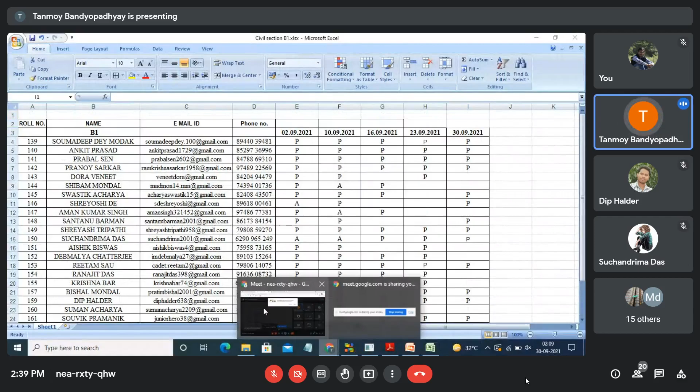So today we'll be starting the fifth experiment, which is the torsion testing machine. Okay? So you have studied about torsion.

So this is the experiment sheet for the torsion testing experiment. We'll be looking at the presentation also, though I don't have the slide for this one. So I'll be explaining it directly from the lab manual, and then we'll be having a look at how the experiment is conducted in the laboratory. So this is the torsion testing of mild steel.

Generally we do the torsion testing and tensile testing. These two sorts of experiments are mostly done for ductile material. Mild steel is a ductile material, widely used as this sort of ductile material. So on mild steel, what will be happening is we will be applying a torque on the specimen and

we will be measuring the angle theta. So as we know, when you are applying a torque, you are actually applying a shear stress on the material. Along with the shear stress, a shear strain will be put on the material. We know that within the elastic limit, as with tensile testing, the shear stress will be proportional to the shear strain.

As in the case of tensile test, we had tensile stress proportional to tensile strain, so we got sigma is equal to E epsilon. In case of torsion testing, you will have shear stress proportional to shear strain, so tau is proportional to gamma, which we write as tau is equal to G gamma. The constant of proportionality is known as the shear modulus.

As in tensile test we call it the Young's modulus, in case of torsion testing, the same constant of proportionality we call the shear modulus. So shear modulus is given by shear stress divided by shear strain, and Young's modulus is given by tensile stress divided by tensile strain.

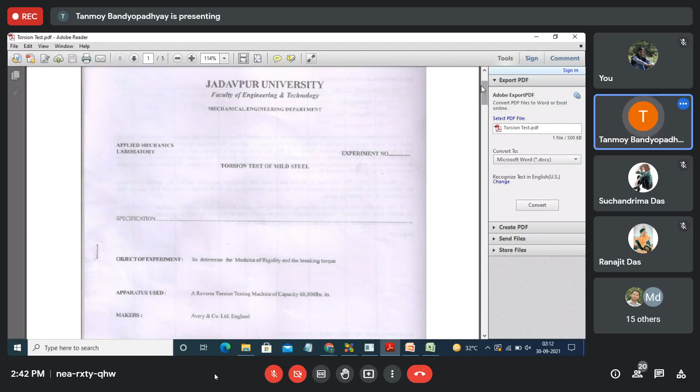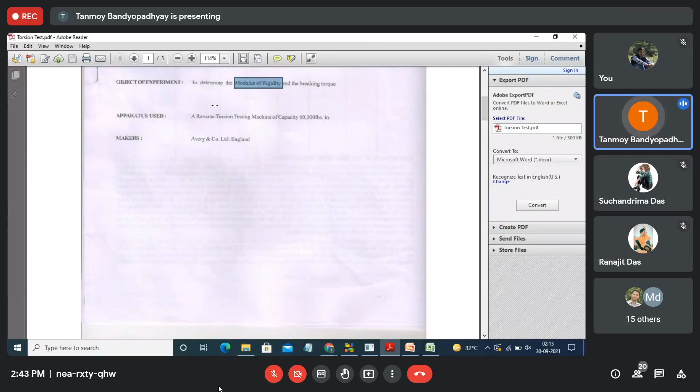So in this experiment, we need to determine the modulus of rigidity or shear modulus of the material and the breaking torque, that is, how much torque is needed to break the material in torsion. The apparatus we are using is a torsion testing machine. The maximum capacity of the machine is 60,000 pound-inches, and the maker of the machine is Avery & Co.

So in this experiment, within the elastic range, as you have studied about torsion, we know that T by J is equal to G theta by L. This comes directly from that relation itself, so we can derive these things, but I am not going into the derivation.

So this G is known as the shear modulus of the material, or the modulus of rigidity of the material. Capital T is the applied torque, capital L is the length of specimen, and theta is the angle of twist corresponding to the torque. So theta in this case is the angle of twist, and sometimes we also call it phi. Phi is theta by L, the angle of twist per unit length. So theta is the total twist that is occurring due to the torque capital T. And J is known as the polar moment of inertia of the cross-sectional area.

So polar moment, you have studied that normally you have Ix, Iy, and since in case of torsion the material is being rotated about the Z axis, you have to consider the polar moment of inertia, Iz or Ip, whatever you call it. So in case of torsion we have to consider the polar moment of inertia of the cross section. Generally the mild steel specimen that we will be testing in torsion has a circular cross section, so the polar moment of inertia, Ip or Iz, will be given by pi by 32 d to the power 4.

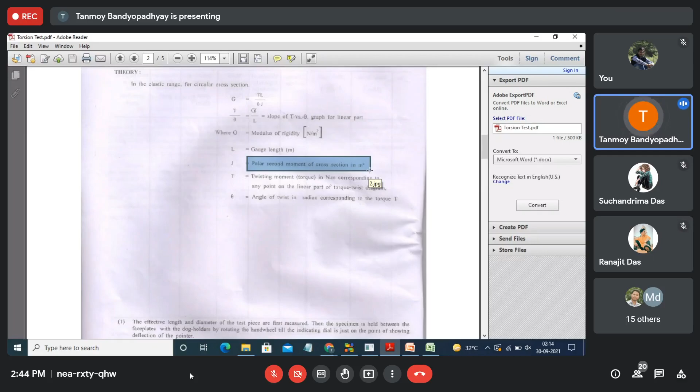So the effective lengths are measured and all. We'll be going to the experimental sheet and looking at this. So here initially we'll be measuring the angle of twist theta. We'll be giving an angle of twist using a lever sort of arrangement, and with that we will be rotating it and applying a twist on the specimen. That twist initially we'll be measuring in degrees, and then we have to convert it into radians, and then measure the torque in Newton meters.

So this is the machine, it's a very old make actually. Generally the values will be coming in pound inches, so those values in pound inches you have to convert into Newton meters.

Once you get those things, you have to plot the values of T and theta. So as in the tensile test, you plotted force versus deflection curve, the F-delta curve, and similarly we plotted the stress versus strain curve. Similarly in this case also, we have to plot the shear stress and the shear strain curve.

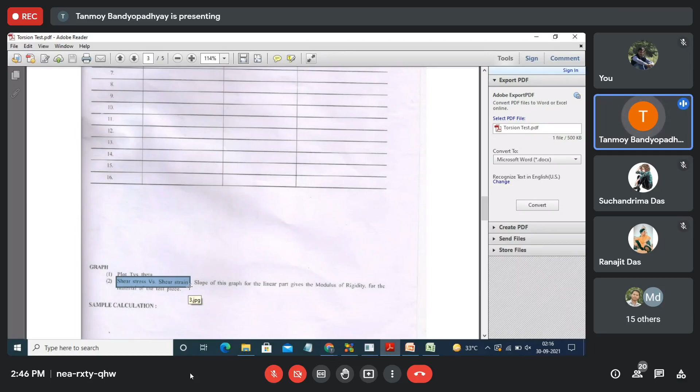So initially you have to calculate the shear stress tau. For a circular cross section it will come out to be 16T divided by pi d cube. From there you calculate the value of tau, the shear stress, and then you calculate the shear strain, which will be given by r theta by L.

Once you get those things, you calculate this for all the values of torque that you are getting, T and theta. Once you get the value of T, since tau is given by 16T divided by pi d cube -- I think you know this, or if you don't I'll derive it, but if you know I will not derive it -- tau is given by 16T divided by pi d cube.

So once you get this value of T, for reading number 1, you got a value of capital T and a value of theta. From the value of T, you put it as 16T divided by pi d cube, and you get a value of tau 1. Similarly from the value of theta, once you put r theta by L, you get the value of gamma 1.

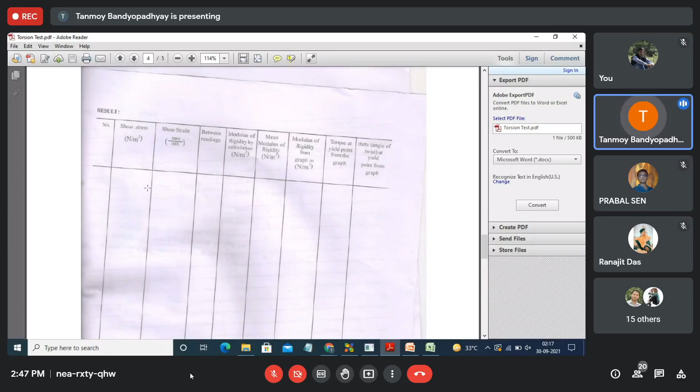So once you get tau and gamma, you divide the two. The modulus of rigidity is the ratio of shear stress divided by shear strain, so you get the modulus of rigidity by calculation. Then you have to calculate a mean value -- you are having 10 or 20 readings, say, so you take the mean of all those readings and get the mean modulus of rigidity of the material.

And then you have to plot a graph, the same sort of graph that you got in the case of tensile testing. Initially you will have a linear region, and then after that it will switch on to the plastic zone, and then you have to plot that and match this value.

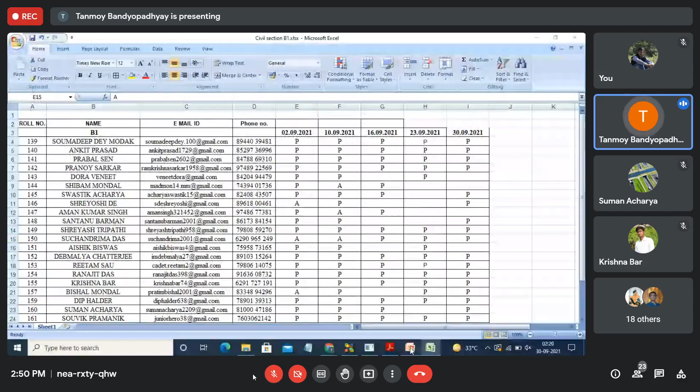I think we were discussing about this. So initially, you have to calculate shear stress, then you have to calculate the shear strain. This shear stress divided by shear strain for all the readings gives you the value of the shear modulus. So by calculation, you will be getting one value of the shear modulus.

And again you will be getting one value of the shear modulus from the graph. So you have to plot the graph, and then within the linear region, you have to take the ratio between the shear stress and the shear strain. From there, you will be getting the modulus of rigidity. So just remember that when you are calculating the modulus of rigidity, the slope you have to take within the linear region. As like Hooke's law, it was defined that within the elastic limit, the stress is proportional to the strain. So this Young's modulus or the shear modulus, they are only defined within the elastic zone.

So in all those readings, how do you understand that the reading has switched to the plastic zone? Once you go on increasing the stress, a point will come where you don't increase the stress too much, but still the shear strain goes on increasing. So the material has actually yielded, or it has moved to the plastic zone, such that without applying too much shear stress, the material starts yielding or deforming by itself. So whenever you see that the stress is not increasing too much, but strain is increasing at a higher rate.

In those cases you can understand that the material has switched to the plastic zone, or the elastic zone has ended. So within the elastic limit, wherever the elastic limit ends, at any point you have to take one point, and then take the slope of the curve of the shear stress and shear strain curve, and that slope will give you the modulus of rigidity value.

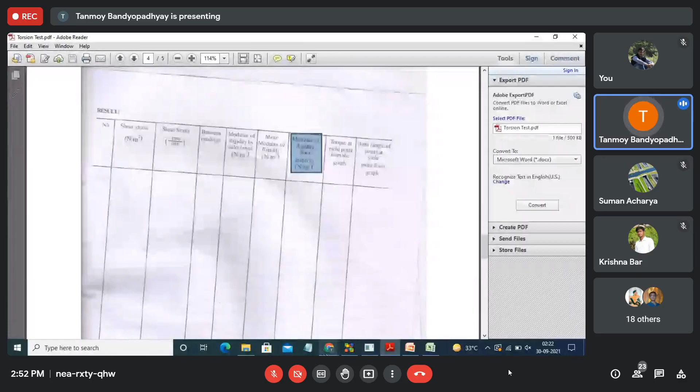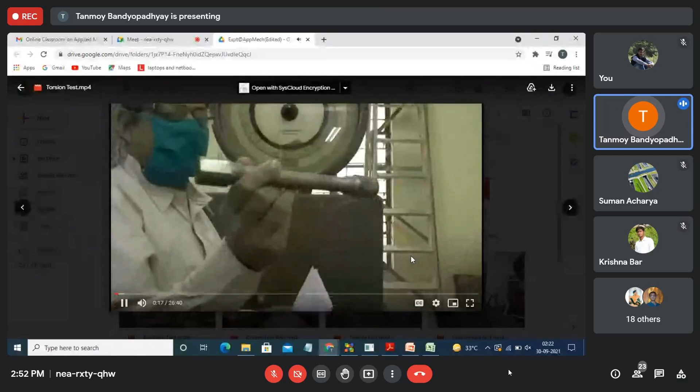So let us now have a look at the experiment that has been conducted. I think the sound is visible from your end, or is audible from your end, I don't know. So let me start from the beginning.

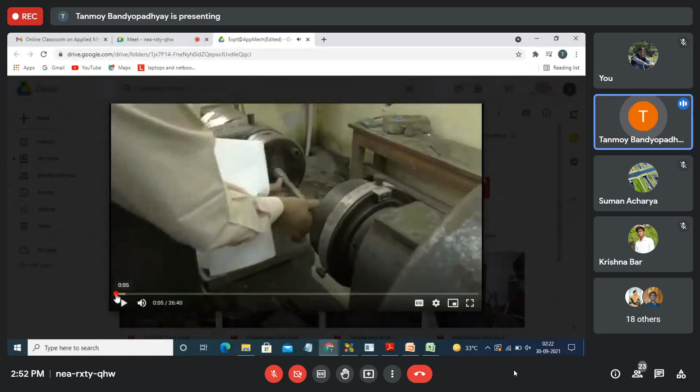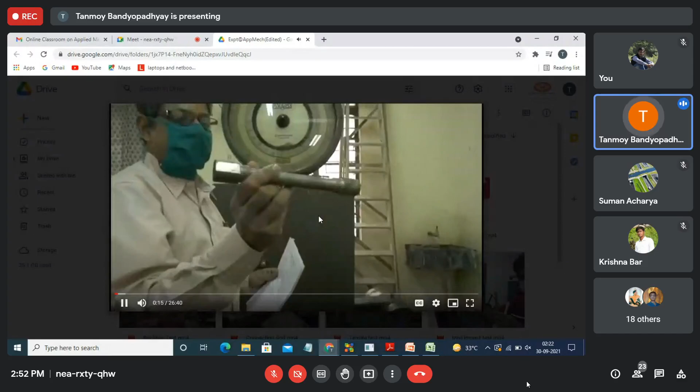This one is the torsion testing machine as we had discussed. Initially you can see that there is a dial, and this is the specimen. The specimen is similar to the specimen that we had been using in the tensile testing. You can see that there are two ends, and the ends are actually just for gripping, with an effective length, or the gauge length portion.

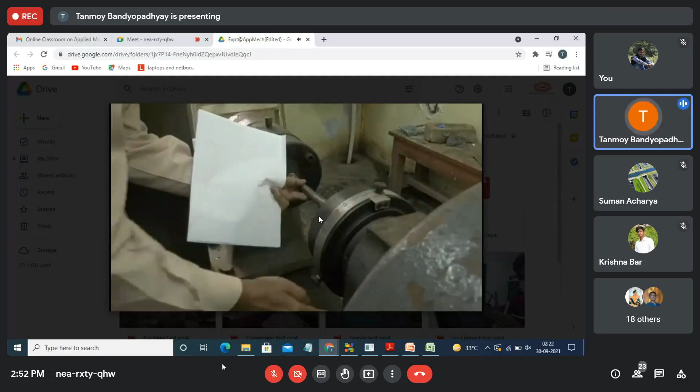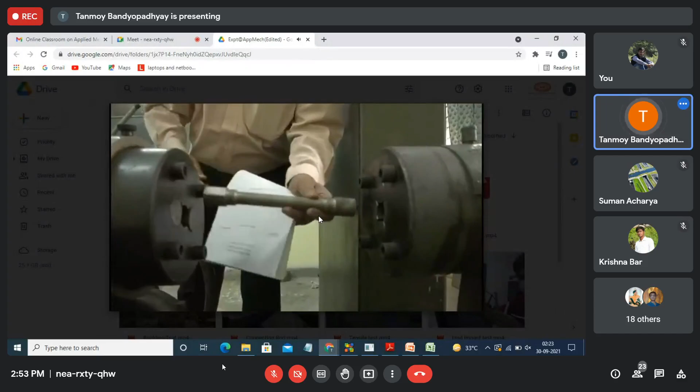So you can see that the two ends are actually made for gripping inside the jaws of the torsion testing machine. One of the jaws will be moved to the right, and the specimen will be fitted in that position. So in between, whatever is the length, that is known as the gauge length of the specimen, and that gauge length will be used in calculating things.

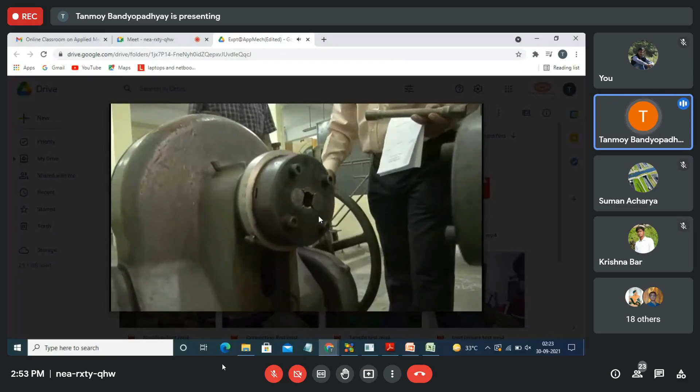Like whenever you are calculating shear strain using r theta by L and all those things, that gauge length you have to take into account, not the entire length of the specimen. The end lengths are actually for holding the specimen or securing the specimen into the jaws.

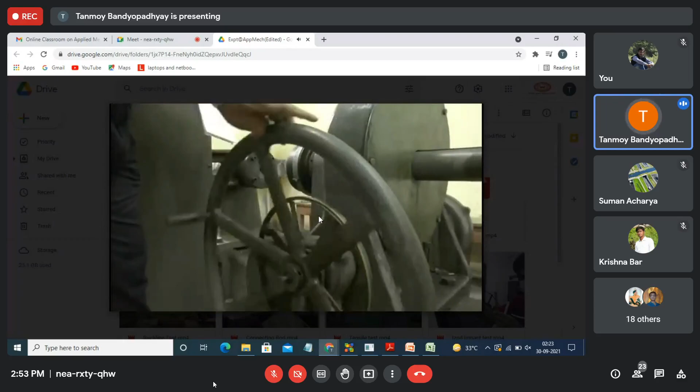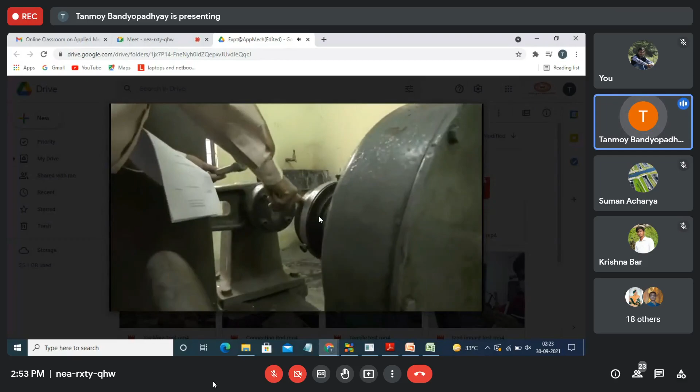So here you can see that there is a hand wheel that is used for applying the torque or twisting on the specimen. Once you rotate this hand wheel, you can apply the twisting on the specimen.

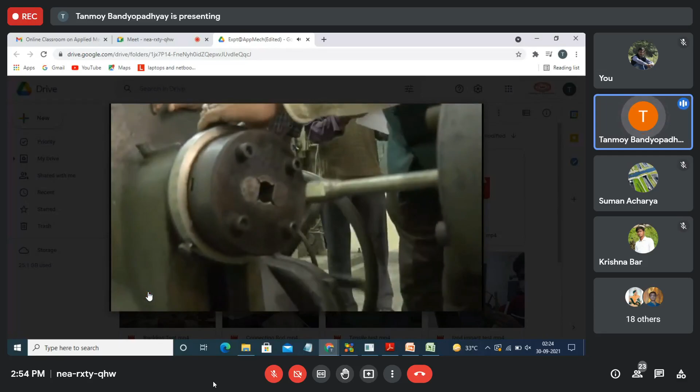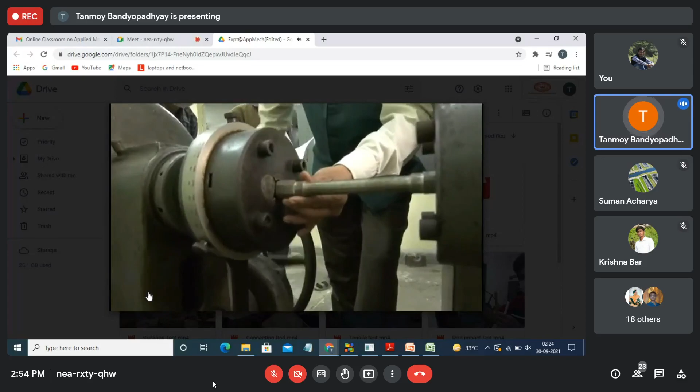This is regarding the jaws and there's a lever sort of arrangement. As this is an older machine, there are actually two scales, meaning two limits. I don't remember the exact limits, but one scale is used if you want to test up to around 1000 to 1500 pound-inch, and if you want to measure more than that, you can use the other scale. In order to switch between the scales, there is a lever sort of arrangement that has been given.

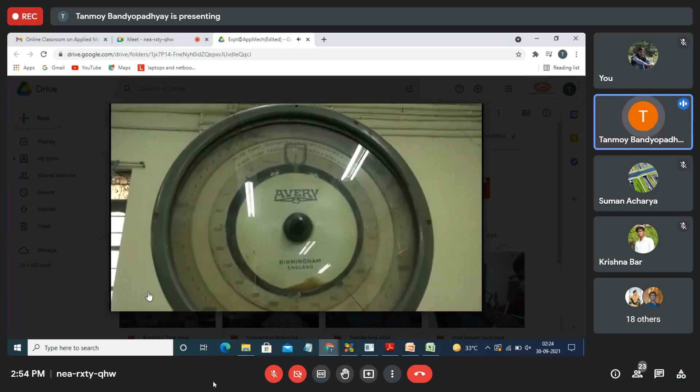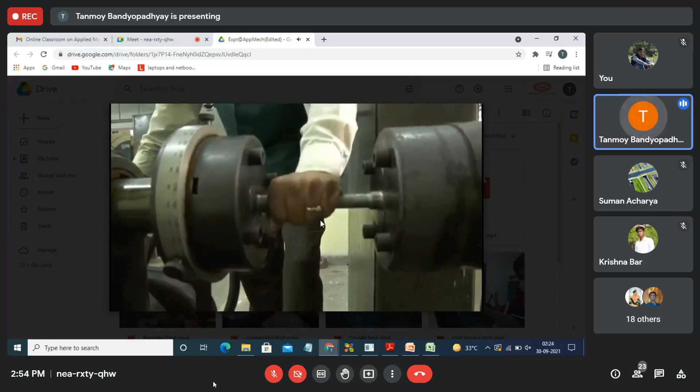Now you can see the specimen is getting fitted on the machine. These are the scales, and you can see there are two concentric scales actually. The inner scale is used for measuring lower amounts of torque, and the outer scale can be used for measuring torque if it is higher than that range. So based on the range of torque you are applying on the specimen, or rather measuring, you can select the appropriate scale on the machine.

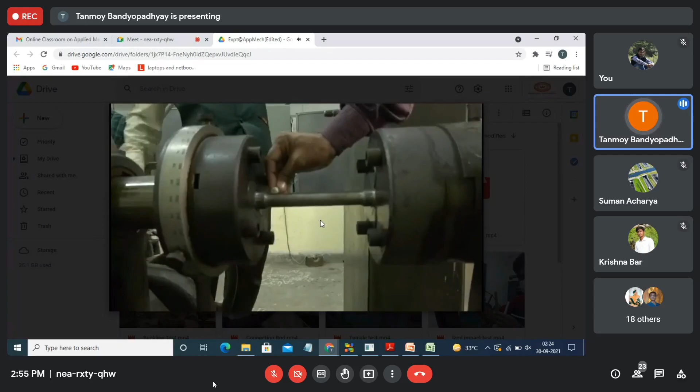Now a marking is being done on the specimen. Since you are twisting the specimen, you are making a straight line on it, so that once the specimen gets twisted, the straight line you drew helps you understand that the specimen is getting twisted.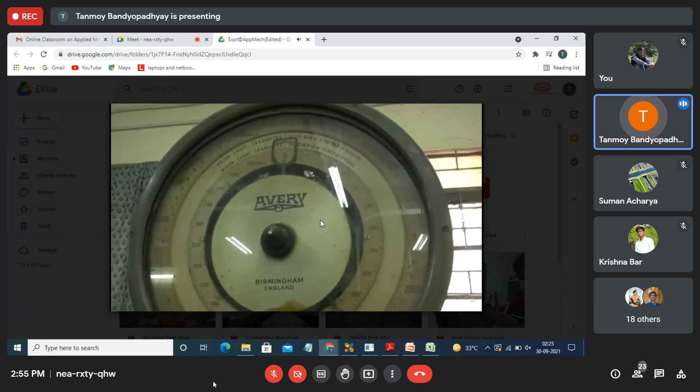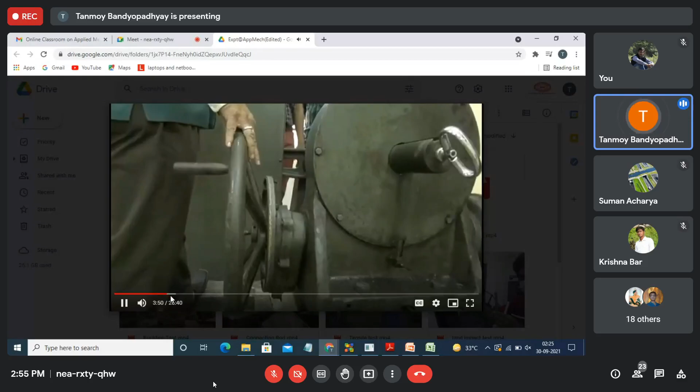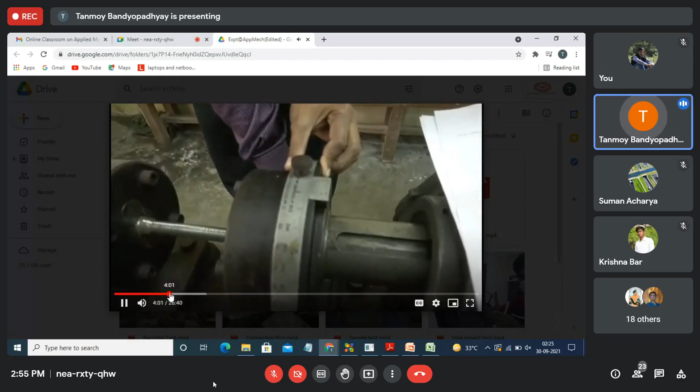This is how the specimen is being secured in the jaws, and this is the main thing. Here you can see that the torque on the specimen can be measured, and there is a circular scale, along with a vernier scale that has been placed.

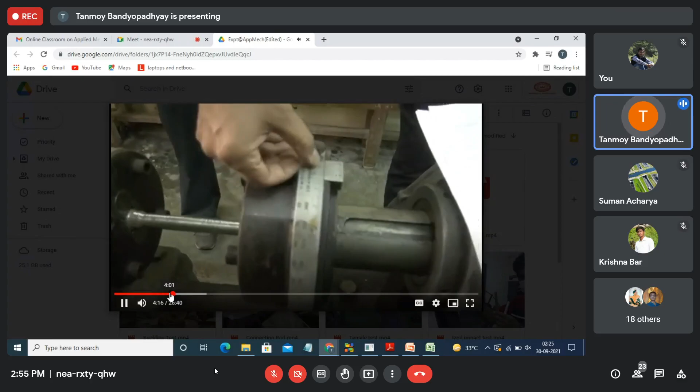So if there is a very small theta which you are unable to measure, you can measure it from the vernier also. You have studied about vernier scales, I think. What is a vernier scale? With a vernier scale you can actually measure finer things, in between the main divisions.

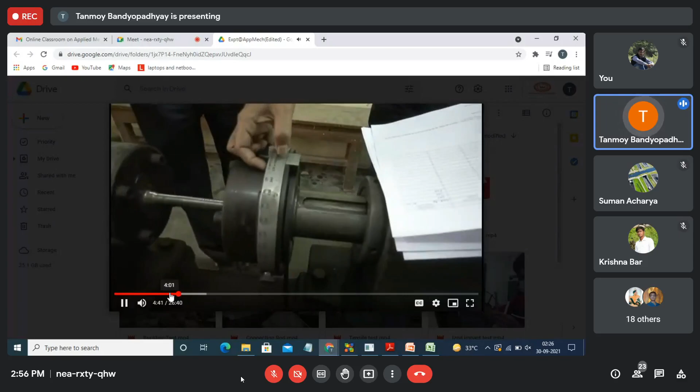You can see there is a main scale, and along with that, a vernier scale has been placed. Wherever there is a measurement, you take a reading from the main scale, then take a reading from the vernier scale, multiply it by the least count, and then you will get the actual rotation occurring inside the specimen. I think you can see it clearly now. There is a forward and reverse, so you can rotate it in both directions.

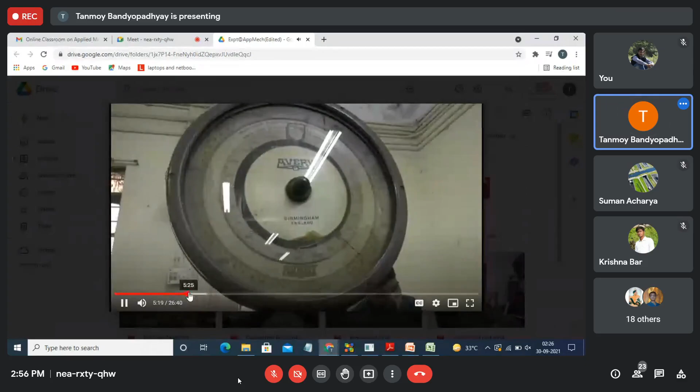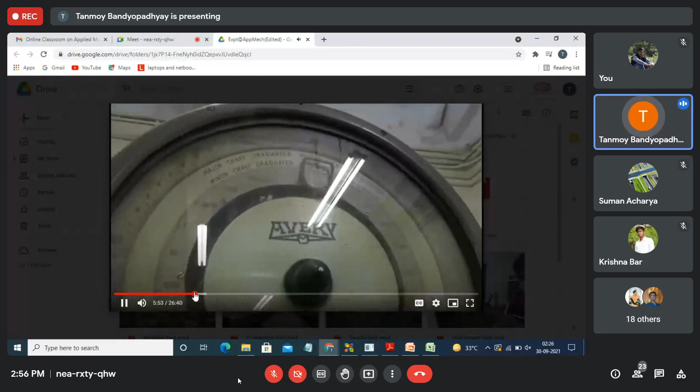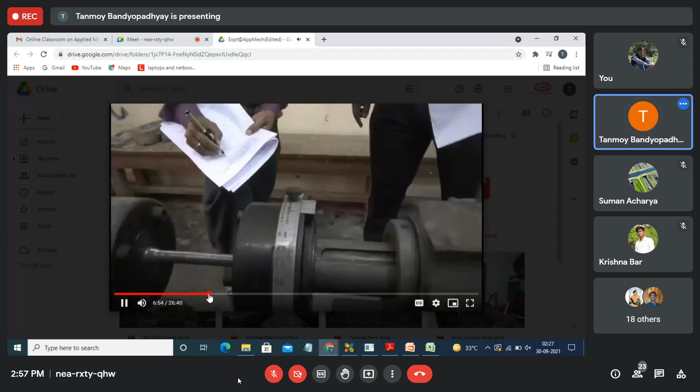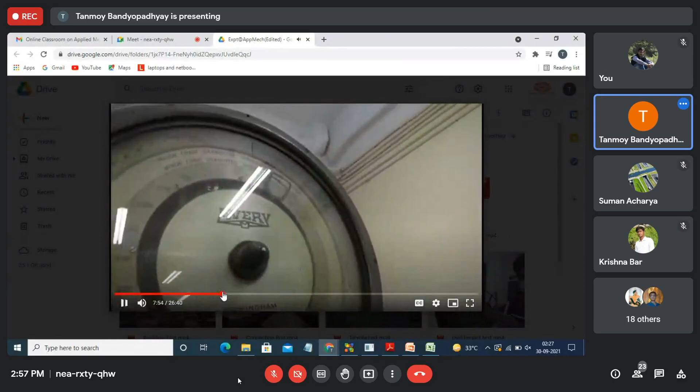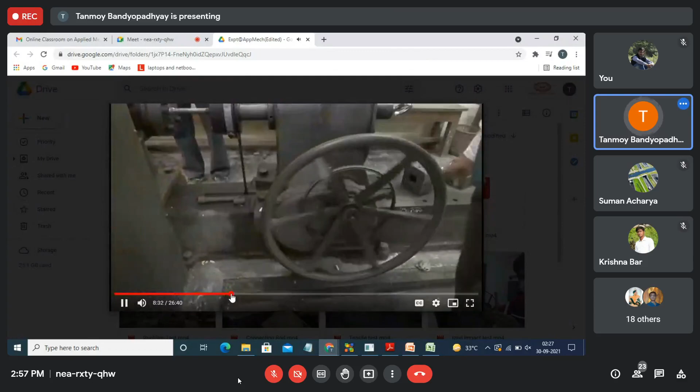So the experiment has been started. Now you can see that the torque is being applied on the machine, and that is being recorded on the bigger, vertical scale. On the scale below, you can measure the twist, the theta value.

Now you can see that the line has been tilted. Initially the line was straight, totally horizontal. Since you are twisting, you can see that the straight line has been twisted. This is the twist on the specimen, you can see the line has been twisted.

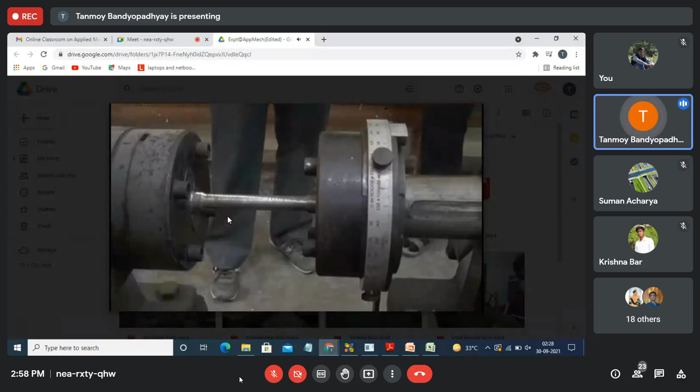Now you can see that the right jaw is rotating and the left jaw is fixed. When the right jaw is rotating, it's putting torque on the specimen. The torque is being recorded as well as the theta. You can do it on the reverse side also, and I think it's being done on the reverse side.

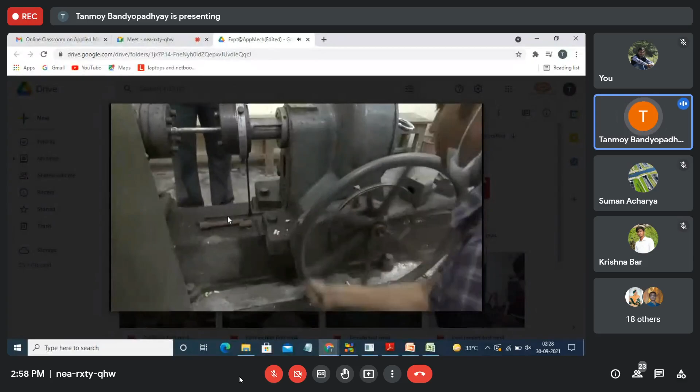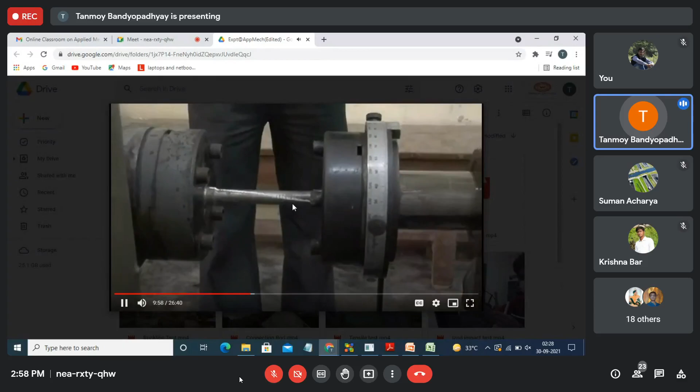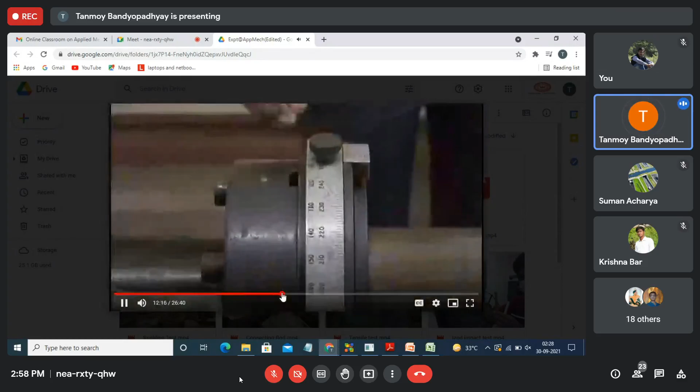You can see that the specimen has been twisted. Whatever torque has been applied on the specimen is a very large value because it's in pound inches. That has to be converted into Newton meter. Now you can see that the specimen has been twisted too much, resulting in a plastic zone.

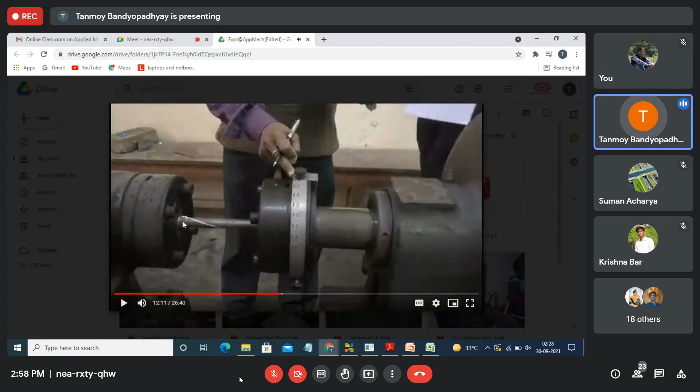Here you can see the straight line - initially it was a straight line. Now it has totally become kind of wobbled, totally twisted.

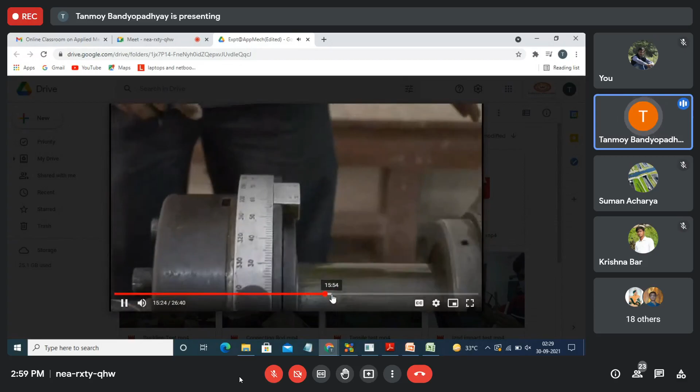So in this way you go on applying the torque on the specimen and measure the value of theta, and note down the values. Here you can see the line is totally twisted and twist lines are appearing on the specimen - you can see clearly certain twist lines occurring on the specimen.

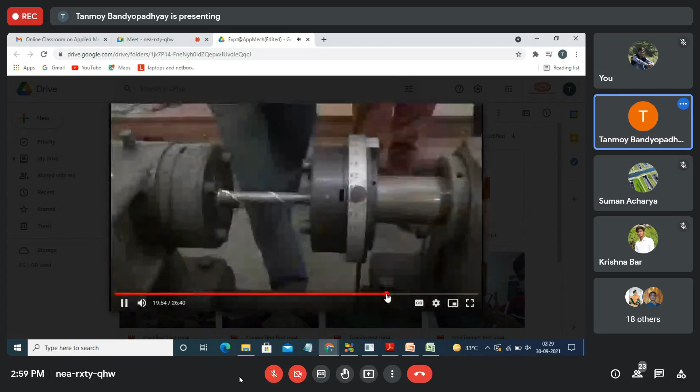Here you can see the straight line is totally rotated. Here you can see just the fracture part. Let us see - so this is occurring. So now the specimen will at some point fracture.

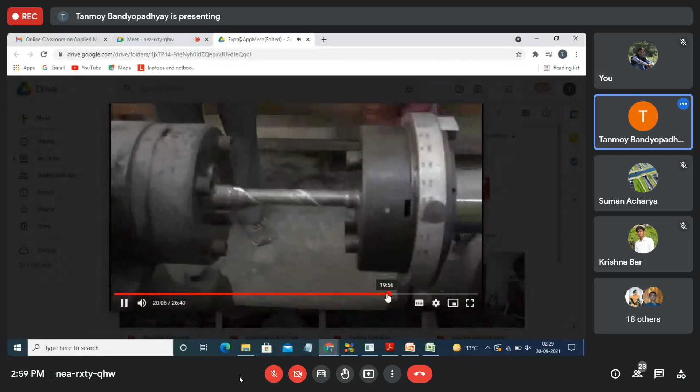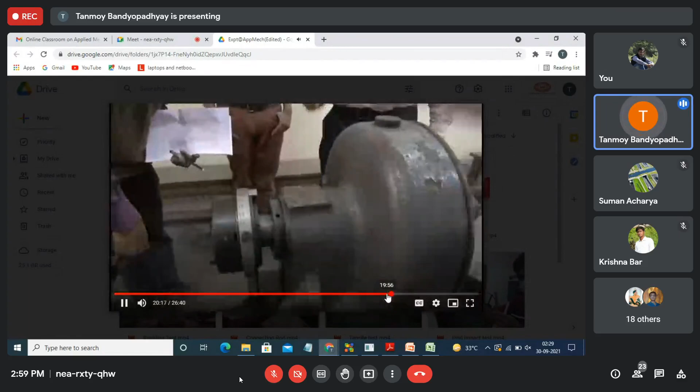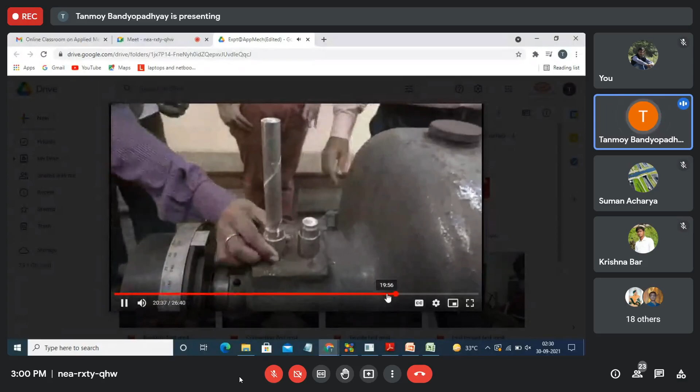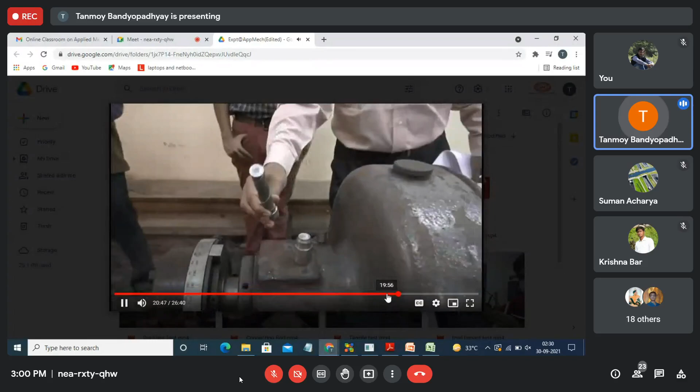Because the fracture didn't occur in the middle - it occurred at the jaw. I discussed this with you last day - since the specimens are not made up to the finest standards, the specimen should have fractured somewhere in the middle, but it fractures just at the end. That's somehow because the loading has to be applied very uniformly, and many precautions have to be followed. But you can see the specimen has broken near the fixed jaw.

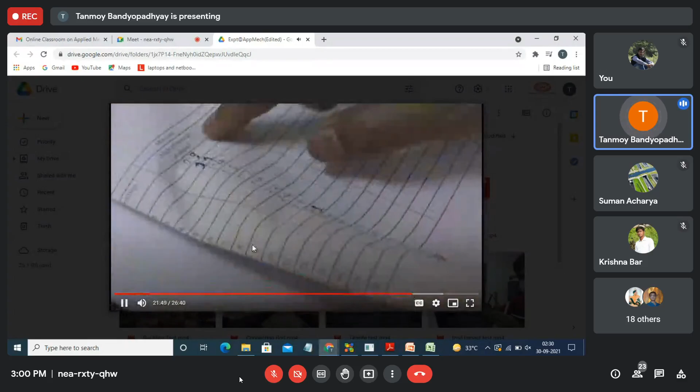Now we are just taking the dimensions of the specimen, the reading. Here you can see the angles have been measured and on this side the torques have been measured. Once you get the readings, I will have one discussion.

Here you can see one point has been marked as the yield point. How do you know this is the yield point? I will be getting the values also - it was I think 2.9 and then it went on to 3.1. Just 1 degree increase in twist resulted in a huge amount of torque. 1 degree theta resulted in a huge amount of torque.

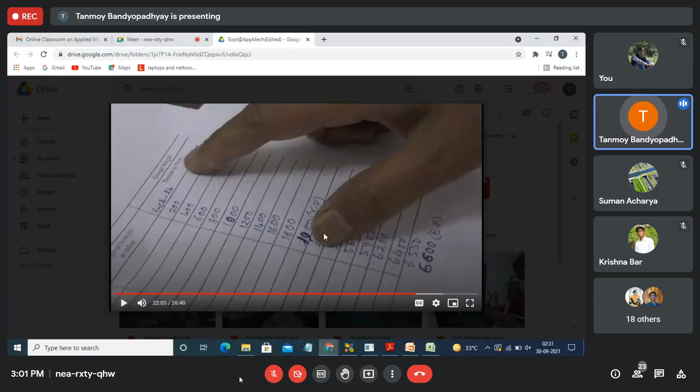Here you can see it was initially 1800, 1900 and then suddenly it went to 4000, 4005 or 5000. A huge amount of torque has to be applied. So this is not the torque - a huge amount of torque is actually getting required. From this point we can say the specimen has moved to the yield point region.

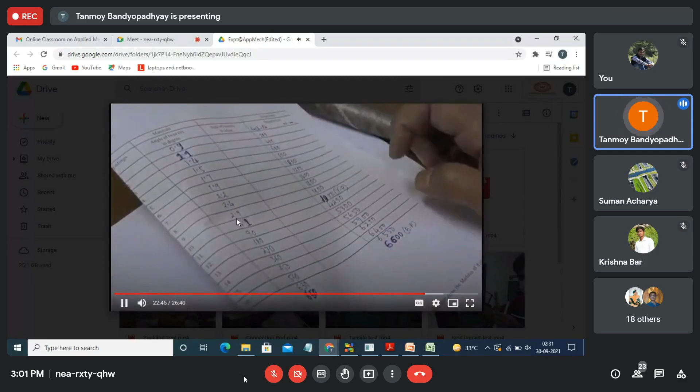So here you can see which I was telling - there were 2.9, suddenly the twist was very high, 4.1. Suddenly the twist became very high and then these are very unrealistic values, 90, 180. From there you can plot that.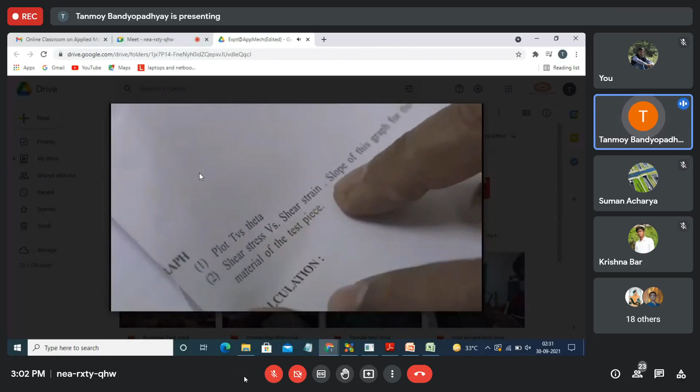Whenever that strain thing actually happens, you can better understand it from the stress strain diagram. Once the strain curve - without increasing too much stress - once the strain becomes very high, you can say the material has twisted, has moved to the plastic zone.

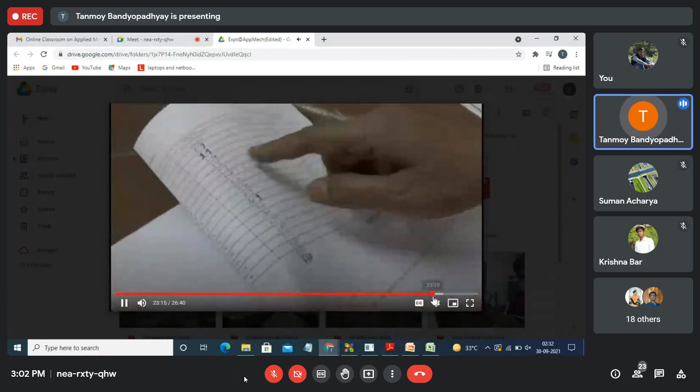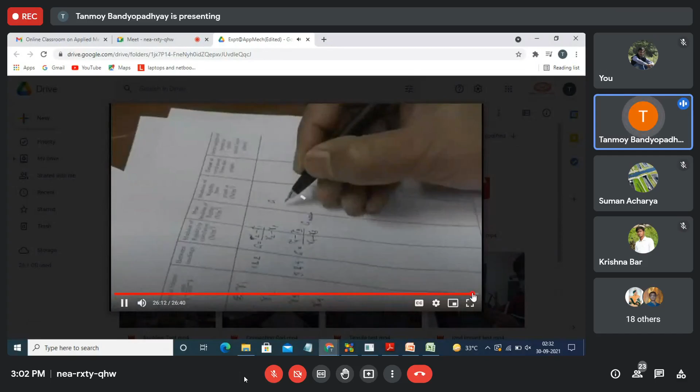So you plot all those things - all these readings have to be plotted corresponding to this. The stress and strains have to be plotted in a graph, and from there we have to compare the values in order to get the value of the shear modulus. So this is regarding the experiment - you can have a look at the experiment at your home.

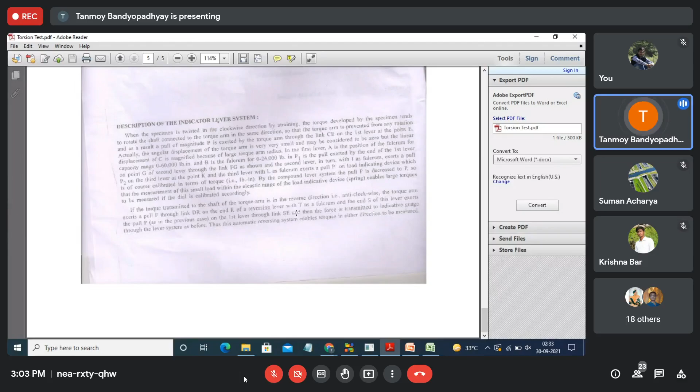You take printouts of the lab manuals and then plot the data on them, and you can do the calculations yourself. Today and tomorrow, in the next class, we will be completing most of the experiments. After that there is nothing actually.

What you can do is I will be sending you 6 blank lab manual copies. You take printouts of all of them, and whatever data has been collected during this videography practice, I will be supplying that data to you. You fill up the lab manuals with that data, do the calculations from your end, and submit the lab manual.

Last year, the evaluation was totally based on a lab test. I took a test of say 50 marks, 70 marks or 100 marks. Nothing related to the lab manual was there.

But from this semester, since we are able to show you the videography of the things, and the set of data are actually available to us, you can understand how the data is gathered during the experiment. I will share the data we got, you copy it into the blank manuals, and do the calculations from your end. I will help you with the calculations wherever you face difficulty. You have to complete all 6 lab manuals and submit them to me.

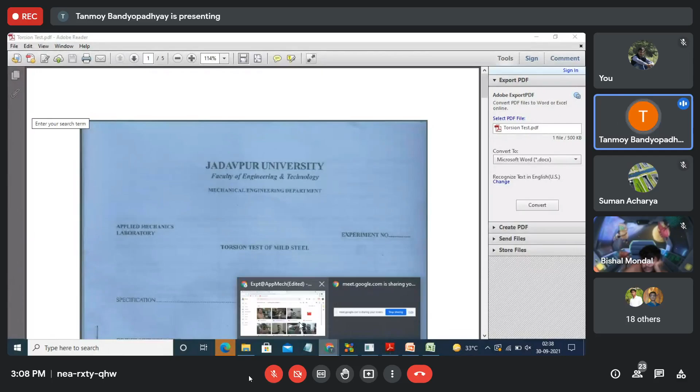I don't have a PPT for this one, so nothing more to be told from my end. Just go by the videography. It's a nice one, a nice experiment, nicely explained. At home, go through the entire videography, and if you find any difficulty at any point, we can discuss it later in the next class.

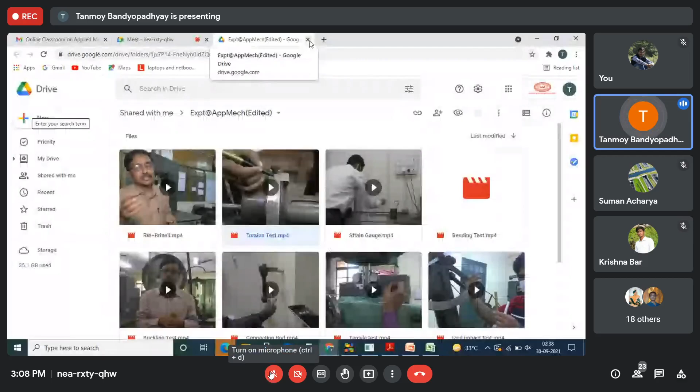Hello. Universal Testing Machine দিয়ে কি কি করা যায়, মানে যে স্ট্রেস স্ট্রেন অ্যানালিসিস করা যায়? হ্যাঁ, Universal Testing Machine দিয়ে কি করা যায়, মানে স্ট্রেস?

ইউনিভার্সাল টেস্টিং মেশিনে you can do tensile testing, compressive testing, bending test - 3 point bending, 4 point bending. Using attachments, many sort of experiments can be done. Mostly যেটা করা হয় সেটা হচ্ছে tensile testing of mild steel।

You don't do a compressive testing on mild steel. Compressive load কে বিয়ার করে যেরকম brick, like all the civil engineering materials like brick, cement, all those things actually. So those sort of things that are supposed to carry compressive load, on them we do compressive test - like compressive test of cast iron or compressive test of stone, brick and all those things.

So compressive test you can do on the UTM machine, and then bending test also you can do on the UTM machine. Just below the UTM machine there is a bench on which we can do a 3-point bending. So you have studied bending, we can put one specimen on 2 roller supports, and then at the middle we have a thing for applying the load. So we can do a bending test on the UTM machine. These are the 3 main experiments that can be done on the UTM machine.